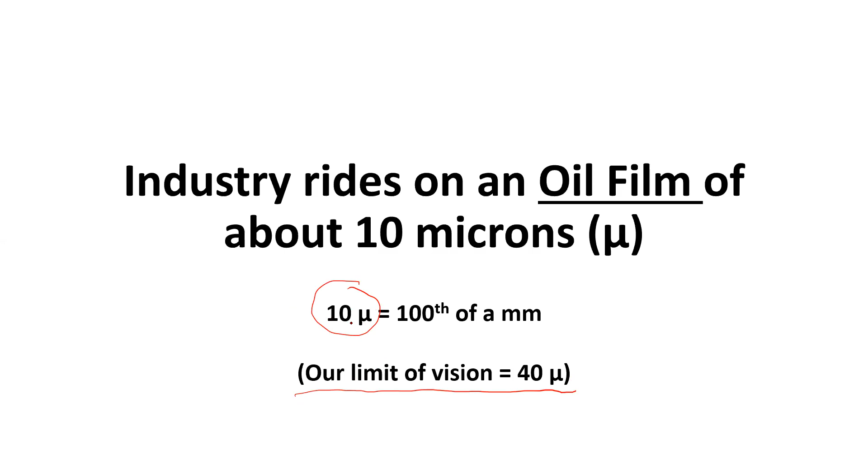Oil varnishing problems across bulk lubricants is a global problem across the industries, with various types of issues related to premature bearing failures associated with journal bearings on turbomachinery in gas turbines and big compressors, frequent choking of filter elements, in addition to deposition of varnish on the journal bearings, causing excessive temperature increase on the bearing,

accelerated wear on the load gears, and also heat exchanger poor performance because of varnish deposition on the lube oil cooler internals, causing an insulation effect, and the oil will not get the heat transfer because of that varnish deposition on the coolers.

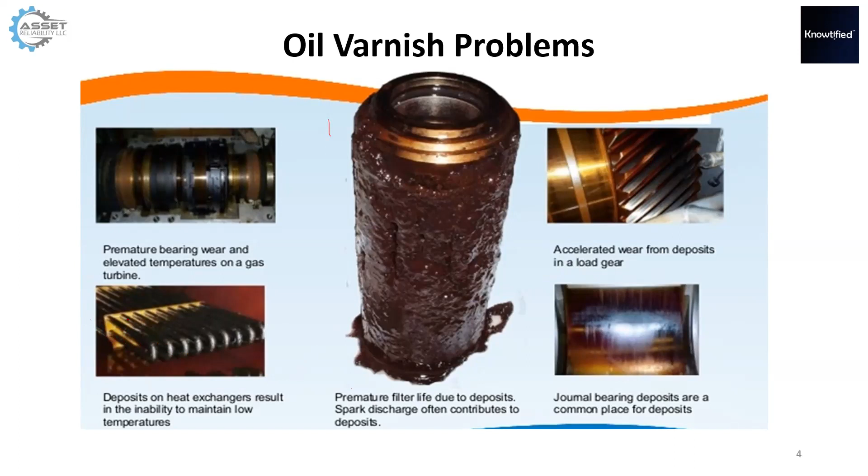Some other problems associated with oil varnishing. Valve sticking is one of the major problems. IGV, inlet guide vane sticking, in the power generation industry is the highest profile problem. In addition there is the servo valve sticking problem, with a clearance of 3 microns. So you can think of a very fine 3 micron clearance when deposited with varnish. The valve sticks, which causes trips on the power turbines, and also restart problems associated with these turbines.

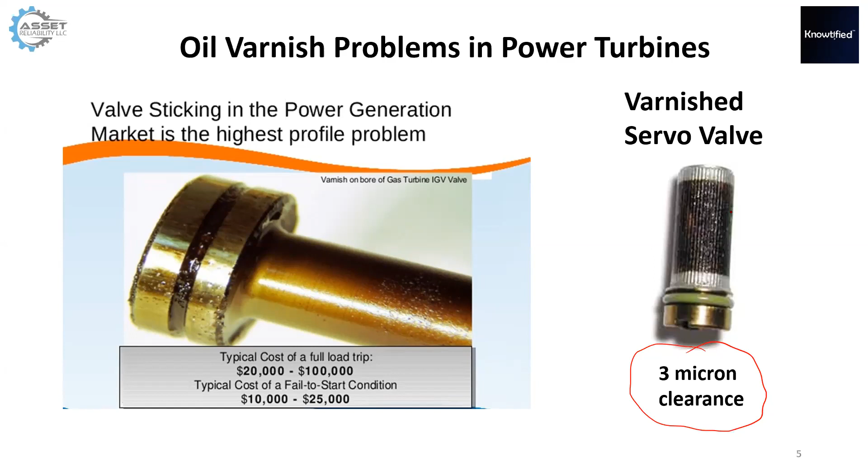Some more snapshots about varnish deposition. Once varnish is deposited on the bearing surface, it creates a hot spot because of the heat dissipation. One of the secondary functions of lubricant is heat transfer from the bearing. But if varnish is deposited, that location, the load zone, would not dissipate heat, and that increased temperature would further escalate and cause further deposition of varnish and change the lubrication regime of the bearing. So this is a common problem across the industry.

So lube oil varnish works similar to cholesterol in the bloodstream. It's like the cholesterol in our machine. What causes oil varnishing? Basically, there are two phenomena which cause varnishing. The first one is the oxidation process, and the second one is thermal degradation. Oxidation is basically caused by four elements: heat, air, water, and metal catalyst.

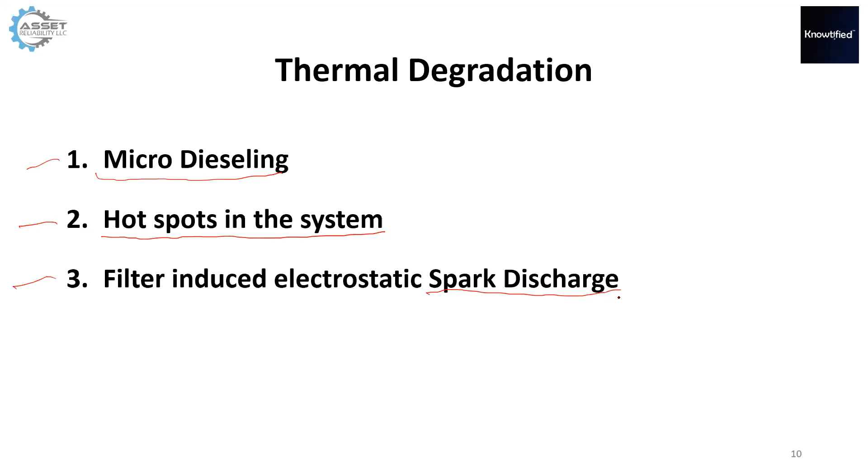The third one is filter-induced electrostatic spark discharge. Spark discharge happens with very fine filtration in inline filter elements. The oil is non-polar, but when it accumulates static charge passing through the filter element and enters the oil reservoir, there is a possibility of a spark discharge, which causes very high temperature, and the excessive thermal degradation causes oil varnishing to happen.

Now, coming to the definition of varnish as per ASTM standard D7843-18: varnish is a thin, hard, lustrous, oil-insoluble deposit composed primarily of organic residue. In this definition, one important thing is that they consider varnish an insoluble deposit. Secondly, they mention it's a chemical change, and unavoidable. So oxidation is an unavoidable process, and this insoluble deposit formation, they mention, is an irreversible process.

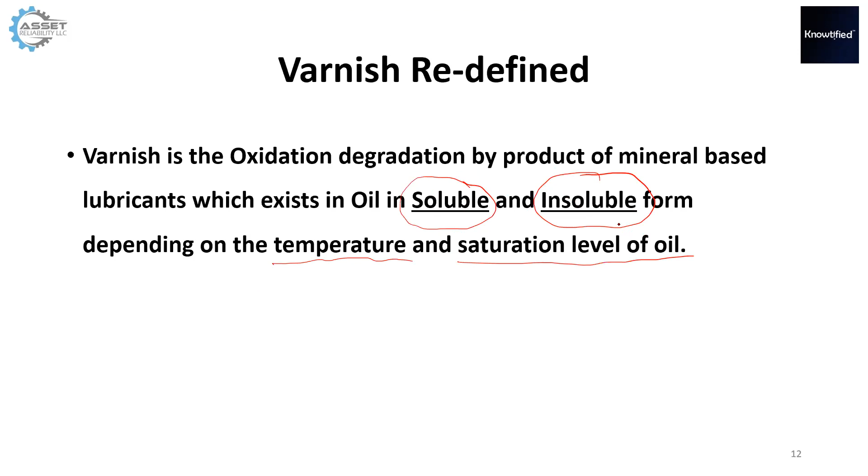Now let's see a redefined definition of varnish. Varnish is actually an oxidation degradation byproduct of mineral-based oils, which exists in the oil in two forms: soluble and insoluble. So instead of only one form, varnish exists in two forms, soluble and insoluble, depending on the temperature and the saturation level of the oil. Let's move to the next slide to see soluble versus insoluble forms of varnish.

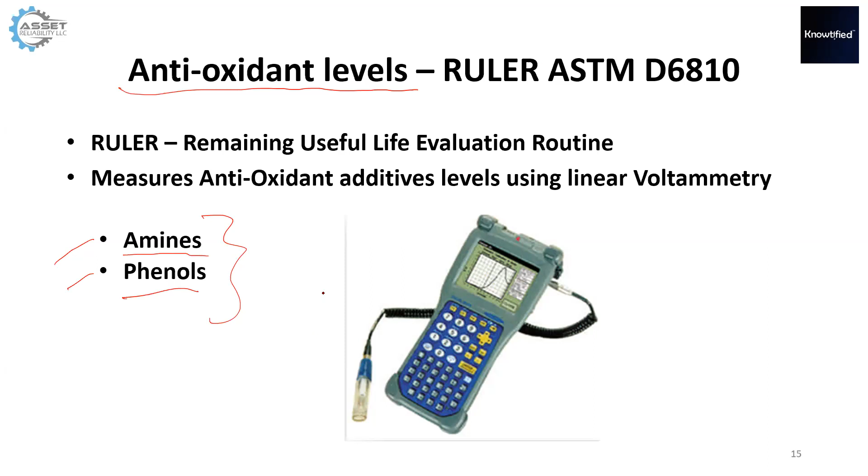So antioxidants are the first line of defense for a turbine oil. Once the amines and phenols get below 20%, the oil is prone to very high oxidation. These antioxidants keep the oxidation level to a minimum. That's why they are very important to be monitored. A lot of companies don't even have this particular test included in their oil analysis program. These are the two important tests that need to be part of it. There are several other tests also.

So now coming to the oil filtration technologies, how we can fix or remove the varnish from our turbine oils.

See, the conventional method of mechanical filtration can only remove the particles which are insoluble. So all the conventional methods like centrifuging, mechanical filtration, absolute or nominal filtration, even electrostatic filtration, and some sort of agglomeration and depth media filtration, all these can only remove insolubles. They need actual particles to remove

from oil. But what about the soluble content of varnish, which we were talking about? We have seen the varnish changes its state from soluble to insoluble. When the majority of varnish during the operating condition of a turbine is in the soluble form, how can we remove that varnish from our oil, which is in operation?

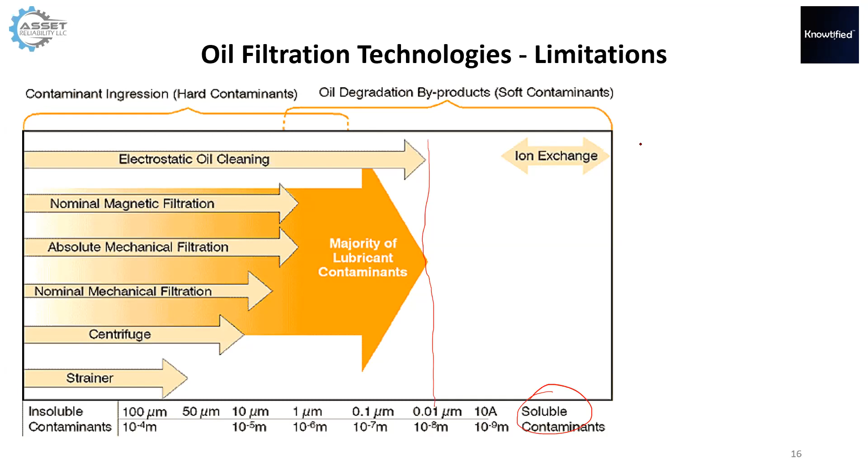So for that, the technology which is very successful for removal of soluble contaminants is the ion exchange resin technology. So ion exchange is the only technology which removes both the soluble content of varnish and also the insoluble varnish. I will tell you how it removes the insoluble varnish in the next few slides. When I am talking about insoluble varnish here, it means the insoluble varnish which has been deposited within the system.

Okay. So there are various varnish removal strategies which are currently being engaged across various companies globally. One is PAG additive. Some companies claim that they have a PAG additive which can resolve and make the oil almost varnish free. Basically, the way PAG additive works is it increases the solubility of the existing oil, and when it

is added at 10% by volume in the existing highly varnished oil, that actually complicates the oil chemistry, and later it would form its own varnish, and this would create a new brand of oil actually. So with PAG additives, there will be no support available from the existing oil supplier whose oil is in the machine.

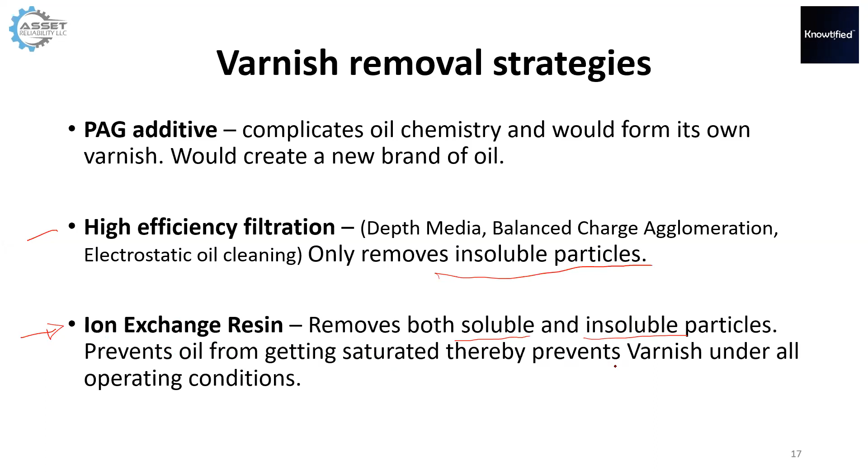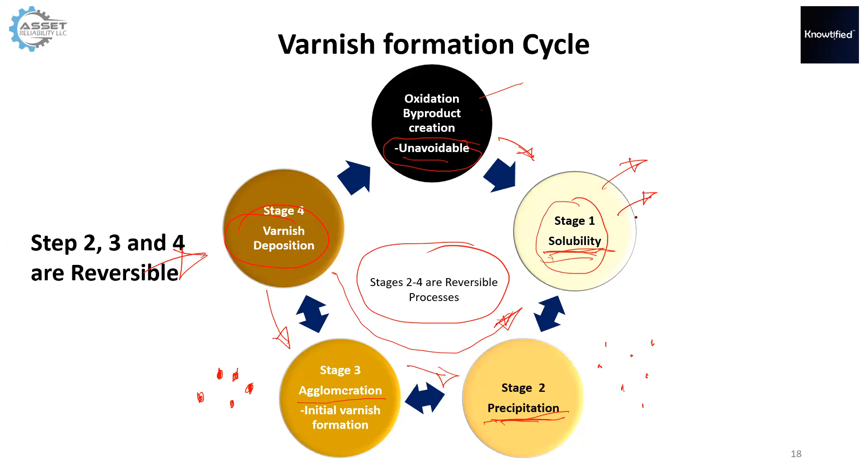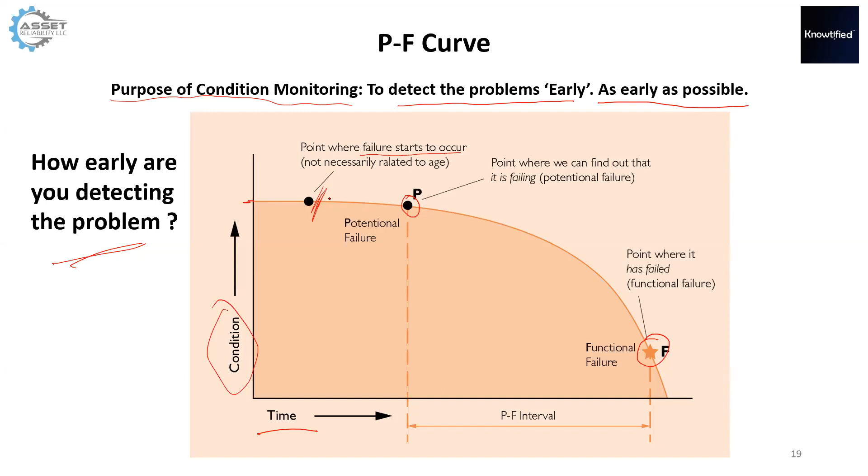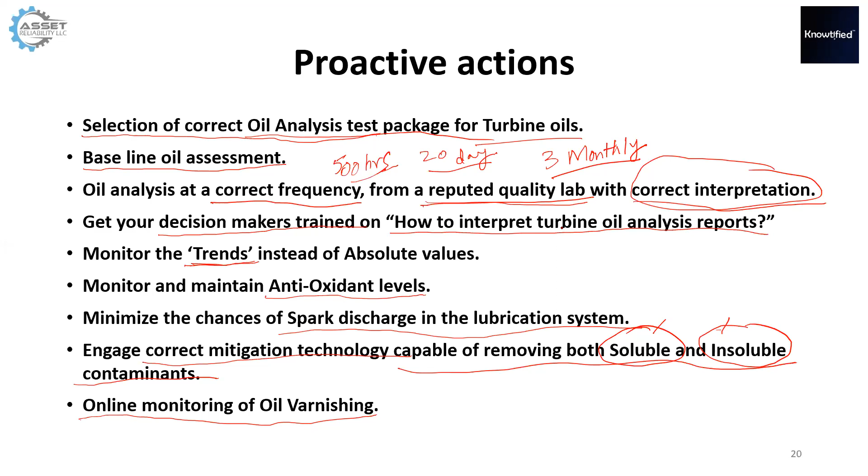Okay, Samir, do we have a result there? Yeah. You can see the result. Not yet. Okay, I can see here. So I think, Mohammed, a big number of your audience have the problem. So this is not a surprise to you, I think. Yeah, I know that. Okay, that's good. So there is a big problem we need to solve for these guys. Sure. Okay, you have another question? Yeah.

Okay, the question: are you satisfied with your oil health management program at your facility? Yes or no? What do you guess, Mohammed? I think you've done this question many times, so there is a consistency among all the professionals and businesses that they are having the same struggle. Yeah. Let's see the answers first. Okay. You don't want him to influence the answers. Okay, let me share the results. Yeah, which is expected.

87% say they have a problem. 90%, I think, say we are not doing much to resolve it. Enormous. 91% are not satisfied with their current oil health management program. So, guys, there is an enormous opportunity. It's not just varnish, it's actually directly addressing the business performance of your companies. Because these big, critical machines with bulk lubricants are actually the heart of your facilities, your plants. With the downtime, there will be enormous losses associated with production and maintenance.

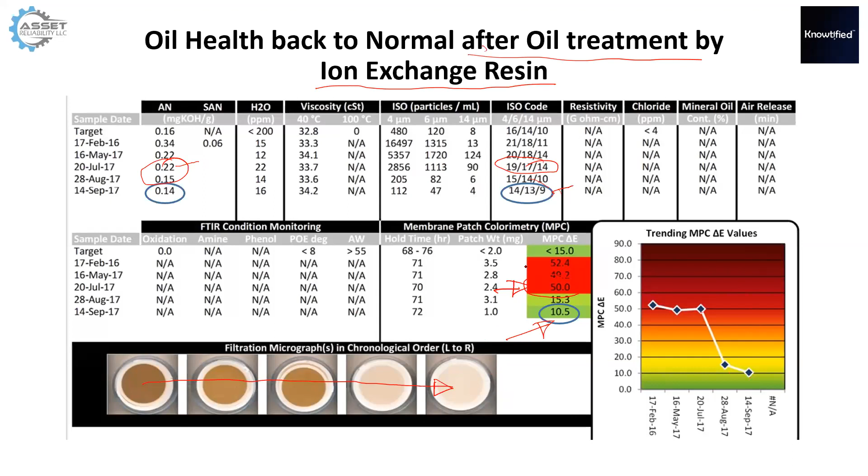Instead, what I have seen with a lot of companies, once the oil is at a very highly varnished state, they go for oil replacement in the hope of resolving the varnish problem, but actually it doesn't. So just an oil change is not the solution to the problem. It's a very expensive option, but still it is not a solution. Last time they replaced the oil in 6 years, next time they replace it in 4 to 5 years, and so on, because the deposited varnish within the system would remain there and would eventually cause more varnish to happen.

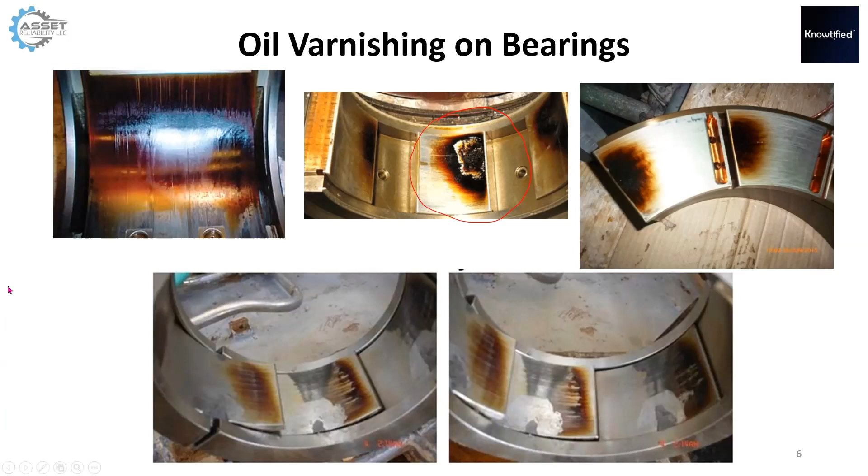Okay, I have a question. In my opinion, the way we are treating the varnish problem is by accepting the varnish as a fact, and we have to live with it, and we need to treat it after it happens. So we know that it happened because of oxidization or because of the thermal issue, and this is the root cause. Right now we are treating not the root cause, we are treating the symptoms, which is the moment the varnish is in the system, how we can remove it quickly before it causes damage.

So from your experience, what we can do working on the root cause before even accepting the varnish is part of the system, and now we have to think about how to take it away. This is a little bit... Farooq, you have asked a very, very good question. This is what the proactive thinking is.

The first thing first is, let me give you an example. Just recently, one of the companies approached me, and they shared their oil analysis reports. When I reviewed their reports, I found that they were using the oil which has almost been obsolete across majority of countries, which was group 1 base oil. So there are various groups of base oils used in the market.